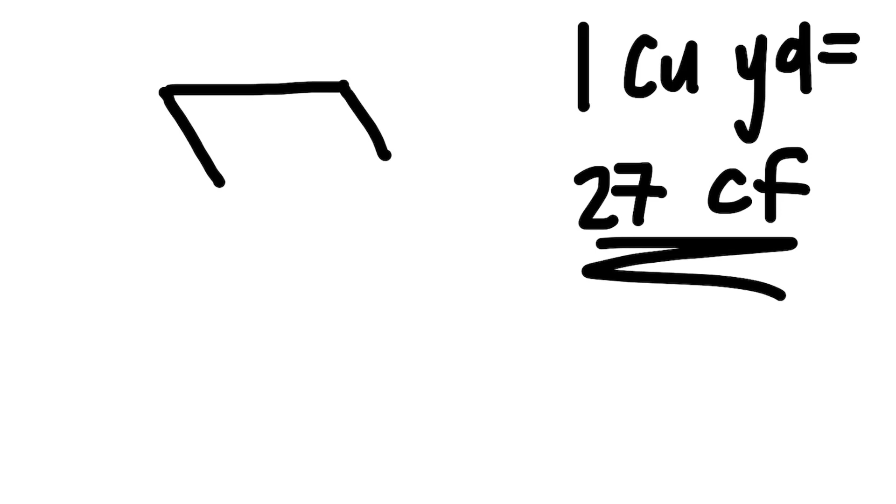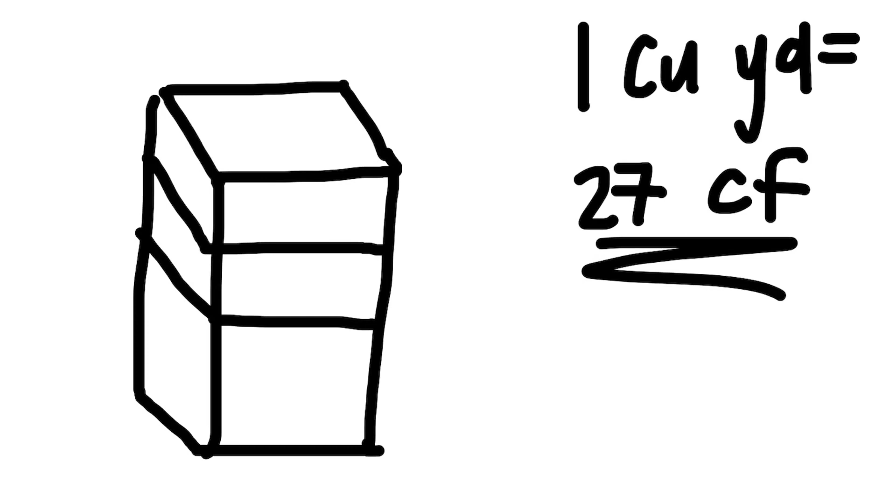So ACI 211 feeds off of something called the absolute volume method. What that absolute volume method means is that we have a certain volume that we're working with. Here in the United States, it's a cubic yard of concrete, which equals 27 cubic feet, because a cubic yard is 3 foot by 3 foot by 3 foot. So I have all this volume to use up. Now, what am I going to do with that volume? We didn't really use a method like that. We used a different method, but ACI 211 gives you a standard guideline to design or choose what to use.

And this is bookcrete. But what do we know about bookcrete? Not the same as labcrete, and not the same as realcrete. This doesn't take into account size of the aggregate or the dirtiness of the aggregate, the number of fines, temperature or weather. Nothing. The type of cement, the cementitious that you're using. And it even has guidelines that the use of water-reducing admixtures, ASTM C 494, may also be used to reduce mixing water by 5% or more. So what they're insinuating is that's not taken into account here.

Okay, so looking at your information, we have a non-reinforced slab on grade, 6 inches thick, exposed to severe freeze-thaw and de-icing. Compressive strength must be 4,000 psi at 28 days. And I want you to design a cubic yard and 1.25 cubic feet. So that question you asked before about how do I go from pavement to lab, by the end of this, you're going to know how to do that.

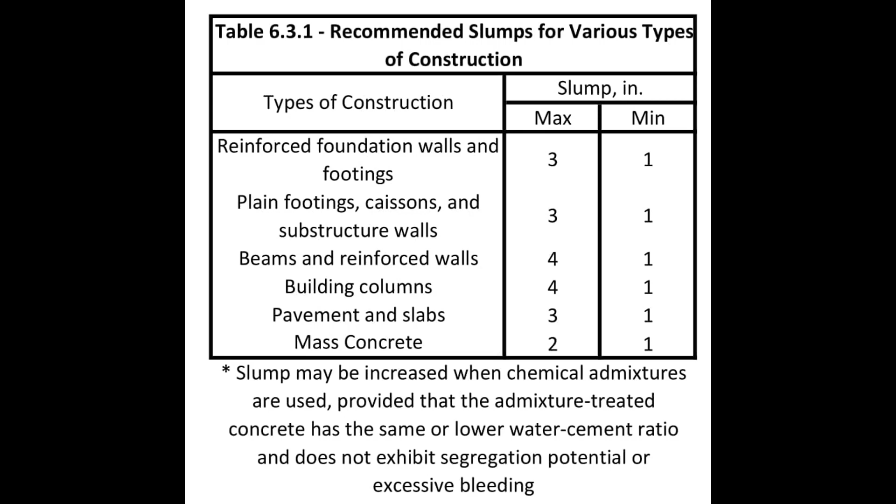So we're going for a total water cementitious ratio design, if that's what you want to call it. Sure. But it's not with admixtures. So the thing that we're looking at are pavements and slabs, and that's what we're designing. So if we look at a pavement, we see maximum of 3 inches. It says maximum 3, minimum 1. So what I called it there was 2 inches plus or minus 1 inch. So this is step 1.

So here, if you want to be picky, you can always say, hey, I know my industry and a 3-inch slump is not what I need. I'm going to choose to bump that up, especially if the requirement is a lower strength. You could always make that decision, but what I say is the first 100 passes that you take through this, you follow it to the letter. You make the mixes in the lab, you make your adjustments from there, but keep this as the level playing field. So I said 2 inches plus or minus 1 inch.

Then step 2, you're going to be using this humunga table right here, and it is an awesome table, and it goes back to a few things. First, your maximum aggregate size, which if we look back at our notes, is 1 inch. We're using a 1 inch maximum MSA river rock. Now, we're also working in a severe freeze-thaw condition. Now, what does that mean? So for severe freeze-thaw conditions, we have to use air-entrained concrete.

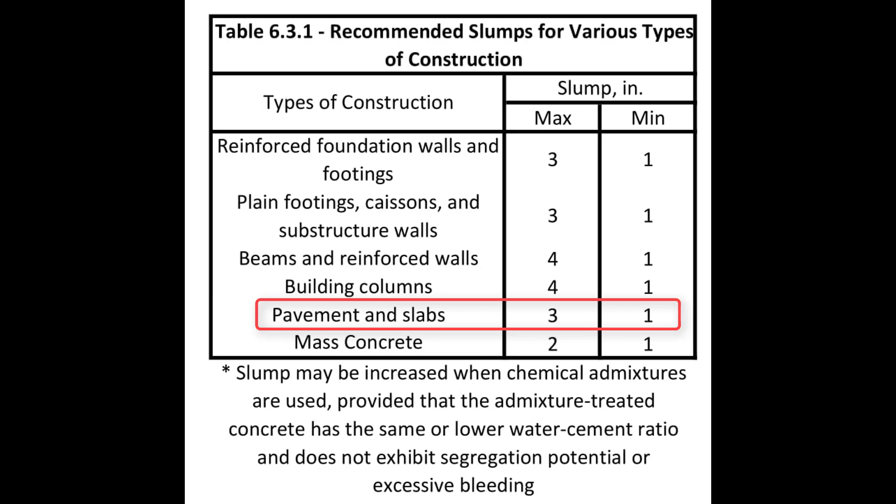Oh, yes, sure. So, going back to this table, this is where we were at. Coming to this table, the first thing is we have a 1 inch maximum sized aggregate, so we're in this column. Then we have to decide, are we non-air entrained or air entrained? Because we're in severe freeze-thaw, that's back in our notes right here, we're in the air entrained, just like you said. So we come down to here. Now the question is, what is our slump? And we said 2 inch plus or minus 1 inch.

Now, if I was on the higher strength side of that, I would choose closer to the 1 inch. But because I'm on the lower strength side, I'm going to choose 3 to 4 inch slump. And that's what this column is, right? So we're on this second level. And that comes to your water, and that's what this gives you, based on your maximum sized aggregate and the slump that you want: you're going to use 295 pounds per cubic yard of water. Cool.

Now here's the thing. There's a trick in this question. So we've got our 2 inch, maximum size 1 inch aggregate, absorption 1%, blah, blah, blah. The water that we use, I said it was 270, so that was the 1 to 2 inch. So let's go back and say it's 1 to 2 inch, right? We say 2 inch plus or minus, so we'll use 2 inches. That's 270 pounds of water, but we end up subtracting 25 pounds. Why did we subtract 25 pounds?

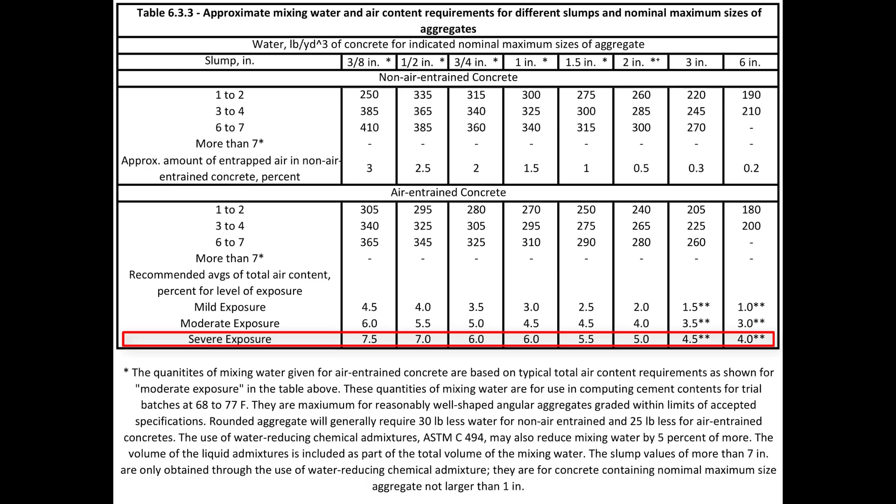Now, there's another piece of information that we need from this, and that is our air content. If you look at the bottom of the table here, you have all these different exposures to freeze thaw, remember this: mild, moderate, or severe. So we, according to our notes, are severe, right? So we go to severe, and guess what? 6%. We're at 6%. So now, we've gone through this non-reinforced slab on grade, exposed to severe freeze thaw and de-icing.

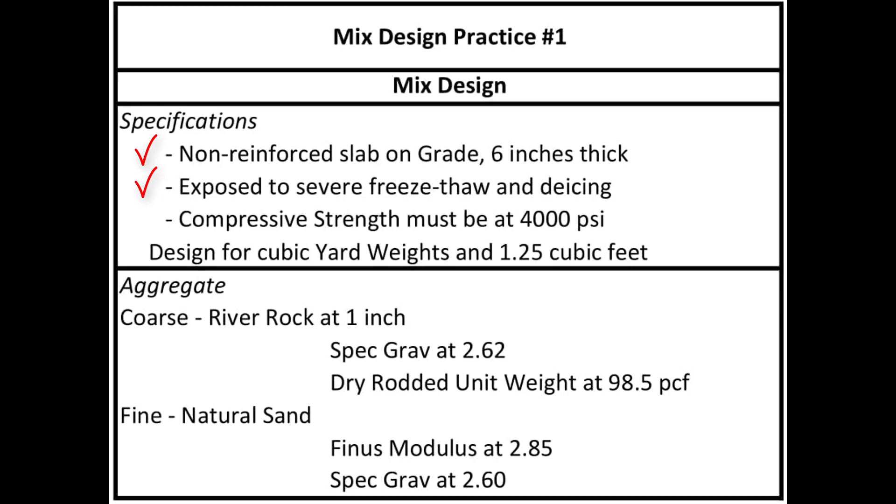Now we're going down to the compressive strength must be at 4,000 psi, and that's supposed to be at 28 days, right? So that's the next step, and that's here in table 6.3.4a. So we say, okay, we want to be 4,000 psi.

Now here's the thing, there's two ways of going about doing this. You could say it's either 4,000 psi, or you can say it's 4,000 psi plus 1,200 psi, saying that we've never used this mix before. And it seems like here I'm choosing to go just with the 4,000 psi. But if you wanted to do that, you can jump to the 5,000 psi or even use linear extrapolation to say, well, I want 5,200.

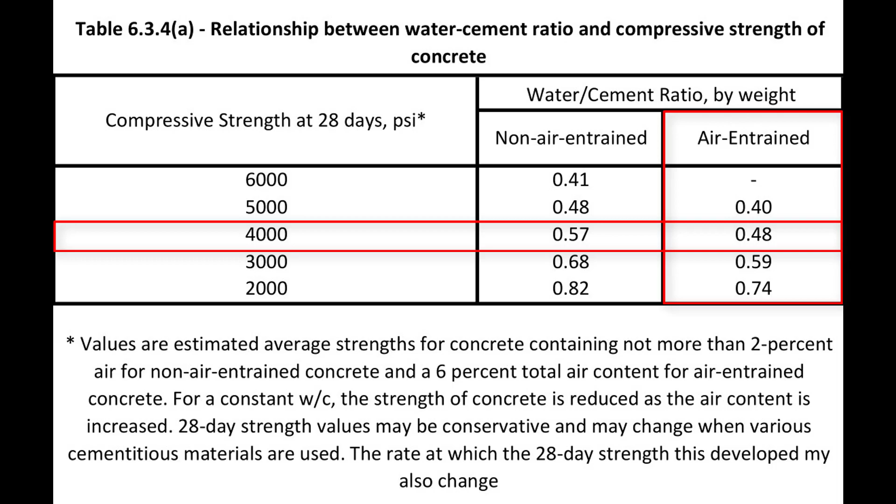Sure. But for us, we're going to go 4,000 psi, and it's air entrained, so 4,000, that's non-air entrained, there's air entrained. So we're at a 0.48 water cementitious ratio. So strength 4,000 psi, we got our air over there at 6%. Strength at 4,000 psi, we use our table, and it says 0.48. And then they have you do a check. They say maximum permissible water cementitious ratio for concrete in severe exposures. Are we in severe exposures?

Yep. So why do you think that they're doing that, Haley? To just cover their butts. Yeah, durability wise. Yeah, you make a porous concrete in a high chloride, high freeze-thaw environment, it's going to go to shit. So it gives you 4 different categories. Structure wet continuously or frequently exposed to freezing and thawing, or structure exposed to seawater or sulfates. So it's more freeze-thaw. We do know we're in the Denver region, so we're not seawater, we're more exposure to freeze-thawing.

Now, this is for a slab on grade that's 6 inches thick. Are we a thin section? No. Are we a railing? No. A ledge? No. Ornamental work? No. Not ornamental. Less than 1 inch cover over steel? No, because we're non-reinforced. So we're all other structures, and the maximum we can be is a 0.5. Okay. Where are we? 0.48. Boom. So, are we good? We're good. So that's our next check off. I miss this. Right? Well, you get to do this all the time. So that's 0.50. We're good to go.

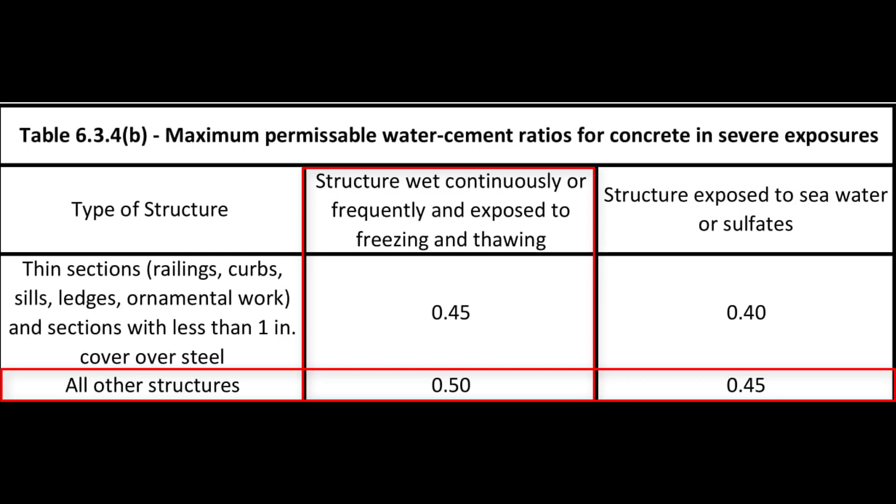Okay, so the next thing that we do is we decide a very specific number that we need from this table 6.3.6 to determine the volume and then the weight of our coarse aggregate. And that number is called the volume of coarse aggregate per unit volume of concrete. Isn't that an amazing number? Yeah. And it's based on a number of things. First of all, the maximum sized aggregate, which we know is 1 inch. So there's our 1 inch. And then it gives us our fineness modulus here that we have to use. And our fineness modulus of our sand was 2.85. So we have this 2.4, 2.6, and 3.0.

And there's 2 things that you can do. You can either say, hey, I'm going to use linear extrapolation and I'm going to determine what it is to the 0.001. Or you can say, well, I have 3.0 and I have 2.8. What is my number closer to? Is it closer to 2.8 or 3.0? And our value was 2.85. Okay. So we're definitely closer to the 2.8, which here I believe is 0.67. Now, we used 0.66, and I believe that was from linear extrapolation. Either way, it's again what you're more comfortable with.

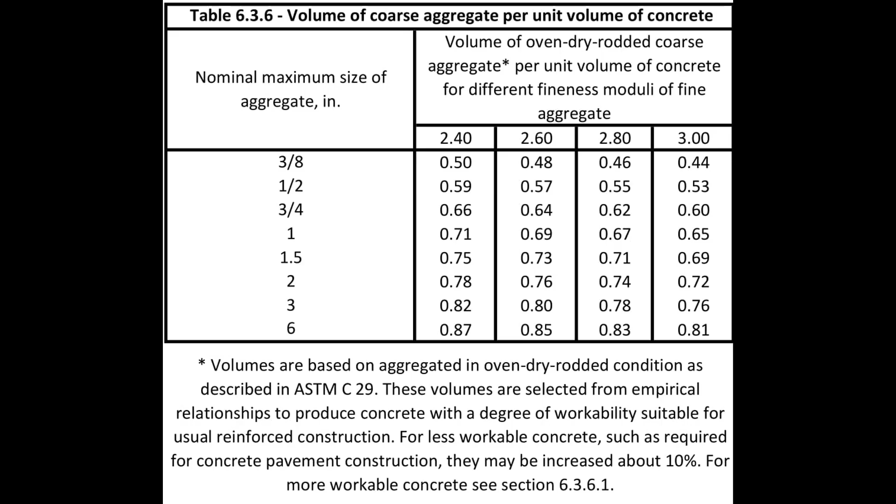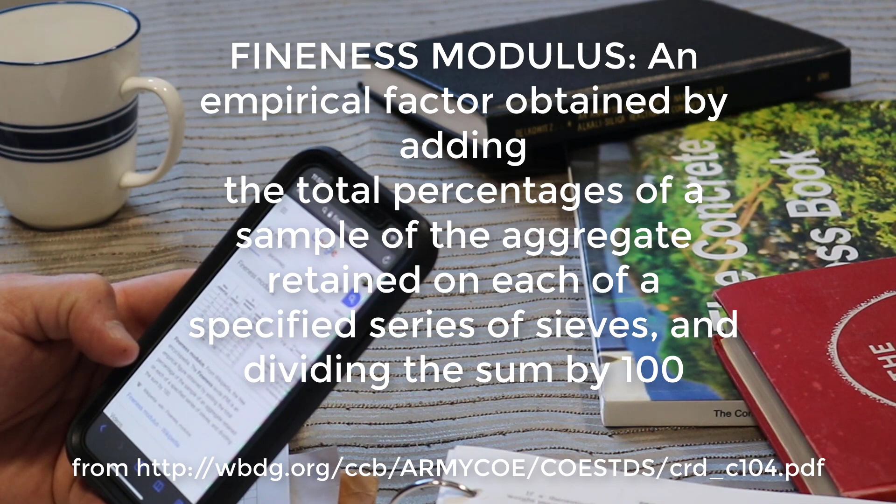What's the definition of fineness modulus? Do you remember that? I think it's the FM. The fineness modulus is an empirical factor obtained by adding the total percentage of sample of an aggregate retained on each of the specified series of sieves and dividing the sum by 100.

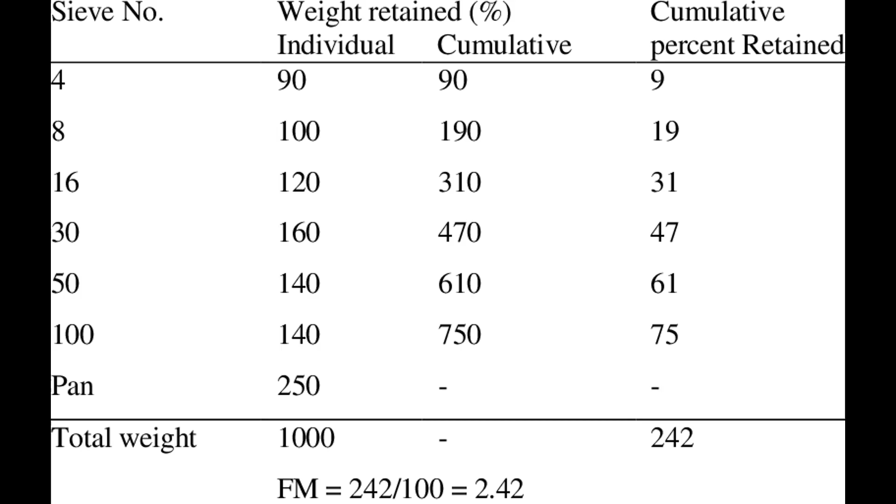And this is about the sand. So the fineness modulus of sand is the cumulative percentage retained on specified sieves. So here you go. They go from a number 4 through the pan, and they're just doing the weights retained divided by 100. Easy. So again, you're taking into account something from both aggregates.

Now, if you look at Oklahoma State University, what is Tyler's software package, the Tarantula? Oh, Tarantula curve. That is a little bit more specific. There's also another product, and you could just do it yourself. Look at different aggregate to paste or paste to aggregate ratios, find where you like, and then when your aggregate changes, you can make those changes based off of the porosity index that you're getting from the new aggregate and the paste content that you liked, or the paste to aggregate ratio, or vice versa.

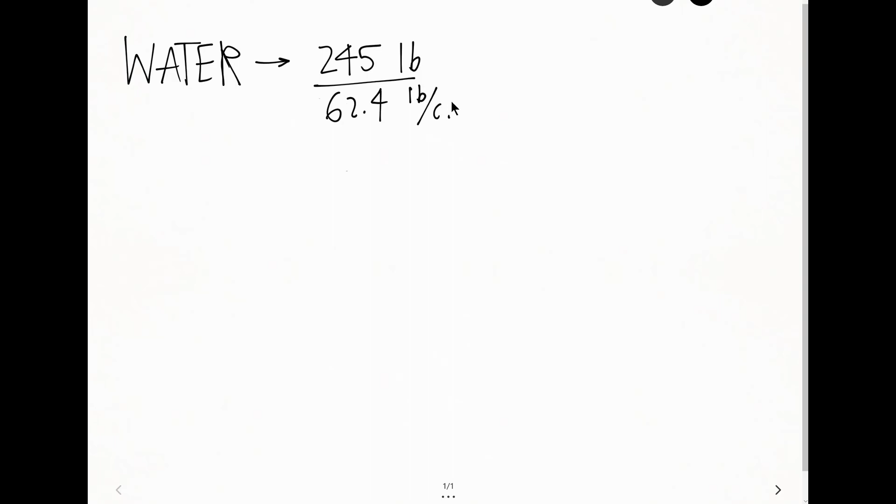So anyway, getting back to this, now that we have that initial information, we can get back to our absolute volume method, 27 cubic feet. So you always got to remember that's how much we're working with. So the first thing is we've got our water, and we had 245 pounds per cubic yard of water, so we divide that by the unit weight of water, which is 62.4 pounds per cubic foot, giving us 3.92 cubic feet out of the cubic yard. 27 cubic feet. Correct.

After that, we've got to look at the cement. Now, we're not looking at fly ash yet. We'll get into the nitty gritty of that.

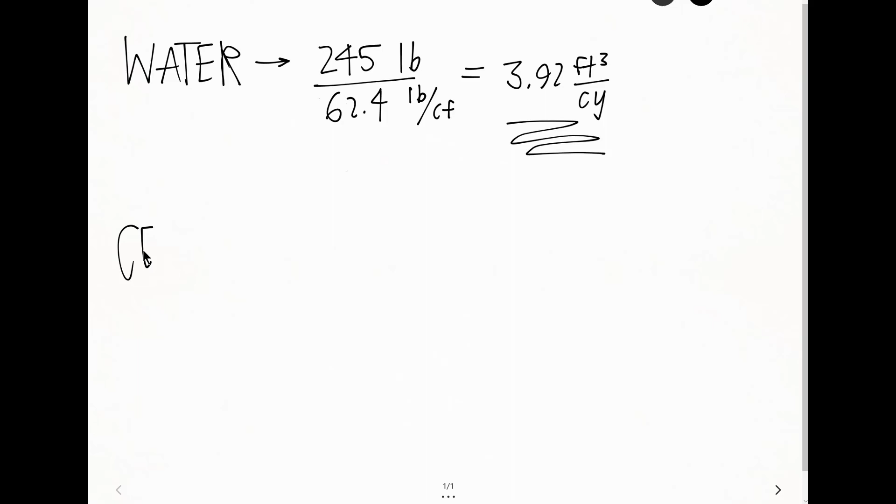No pun intended. I don't understand the pun. If there was a pun. Gritty. Oh, rock. It's funny.

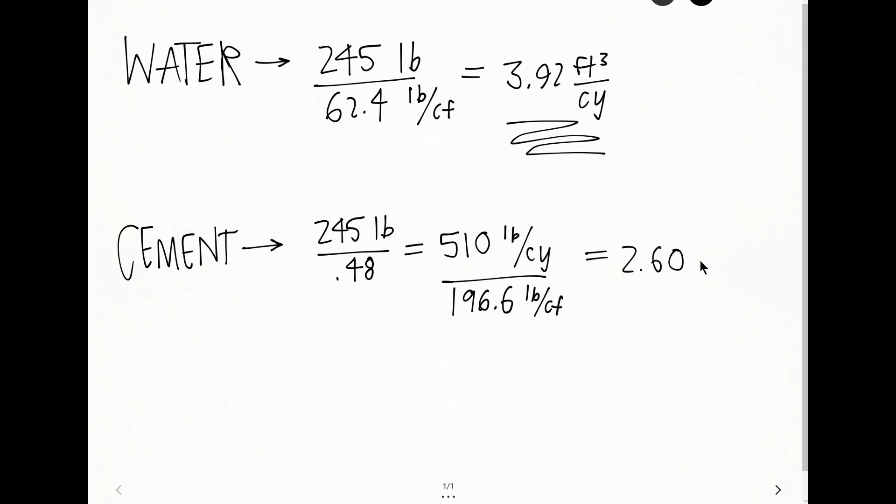But looking at the cement, the first thing we have to do is determine how much cement we have. We do that by taking our weight of water divided by our water cement ratio, which gives us 510 pounds per cubic yard. Now, to get the volume, we divide that by our unit weight of cement. Our standard specific gravity of cement is 3.15. So 3.15 times 62.4 pounds per cubic foot gives us a unit weight of 196.6 pounds per cubic foot. So when we divide 510 pounds per cubic yard by 196.6 pounds per cubic foot, we end up getting 2.6 cubic feet per cubic yard.

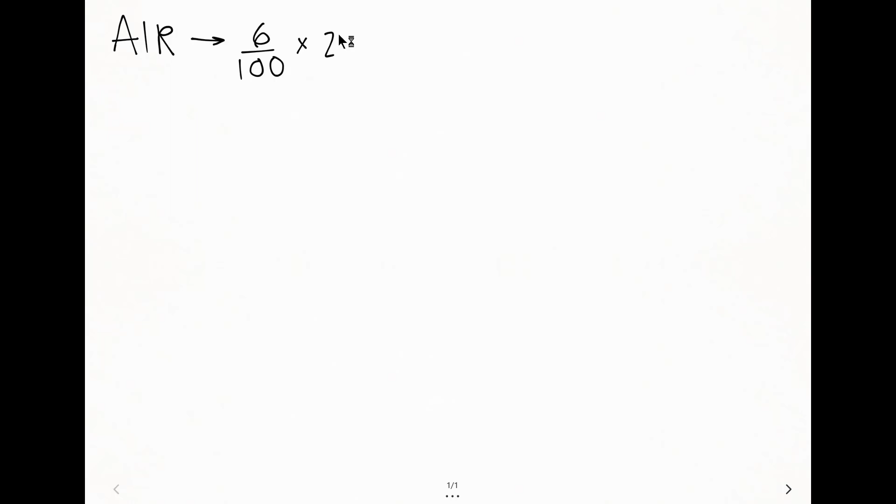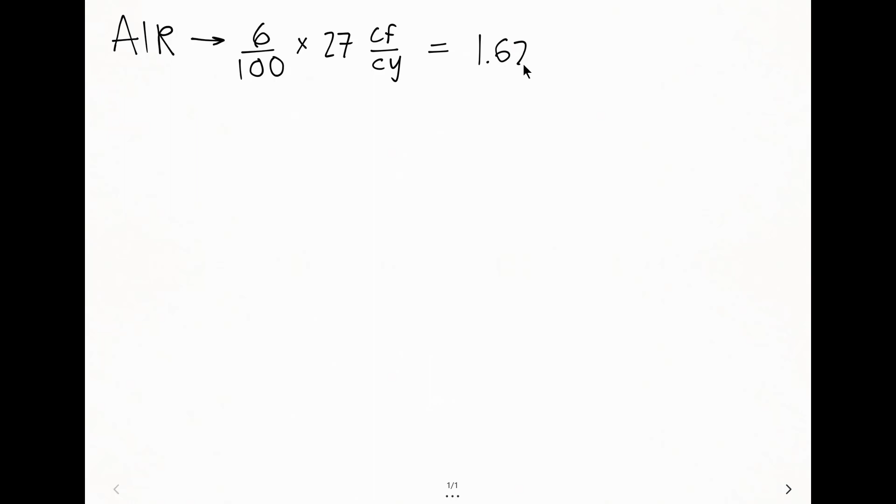Now, so we have the water, we have the cement, and I'll number these. Let's go to air. With air, we know we have 6% air. How do we turn that into cubic feet? Well, if we have a 27 cubic foot per cubic yard volume, and 6% of that is air, we literally just divide 6 by 100 and multiply by 27 cubic feet per cubic yard. And that gives us 1.62 cubic feet per cubic yard.

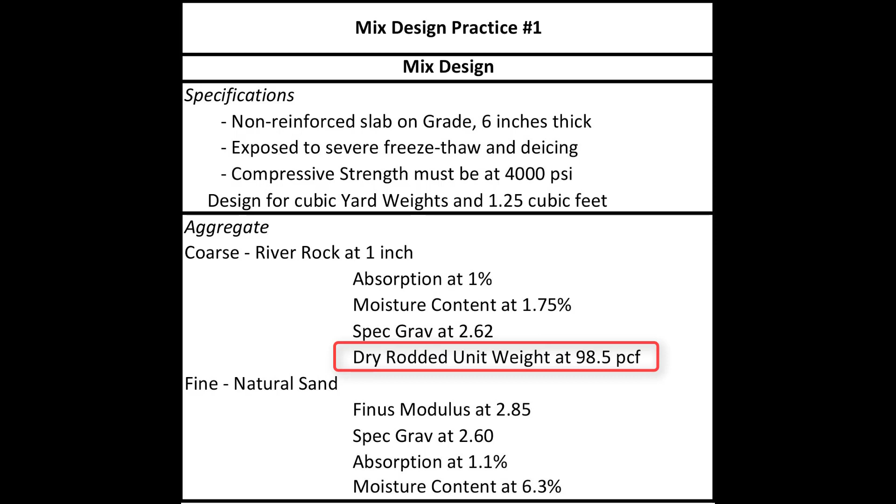Now, going back up to coarse aggregate, we have our 0.66 volume of oven-dried rodded coarse aggregate per unit volume of concrete for different FM of fine aggregate. So we take that 0.66 and multiply it by 98.5 pounds per cubic foot, the dry rodded unit weight given to us earlier. That only gives us pounds per cubic foot, but we've got 27 cubic feet per cubic yard, so multiplying by 27 we end up getting 1755 pounds per cubic yard.

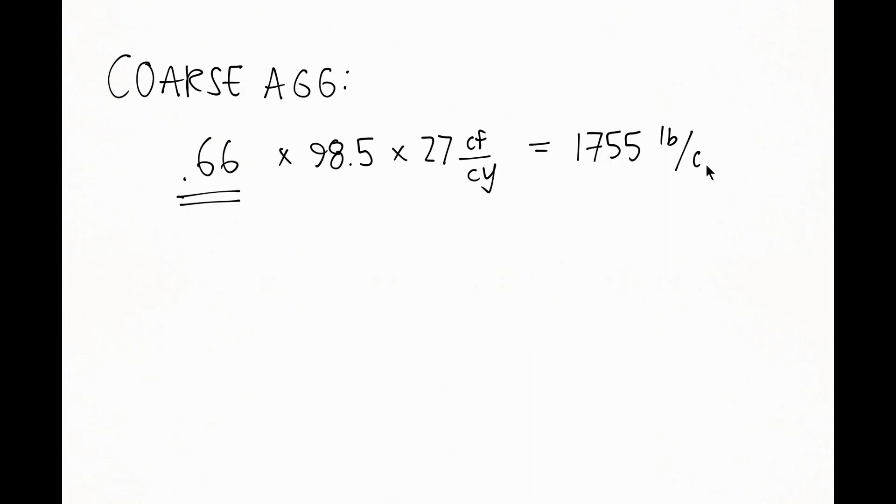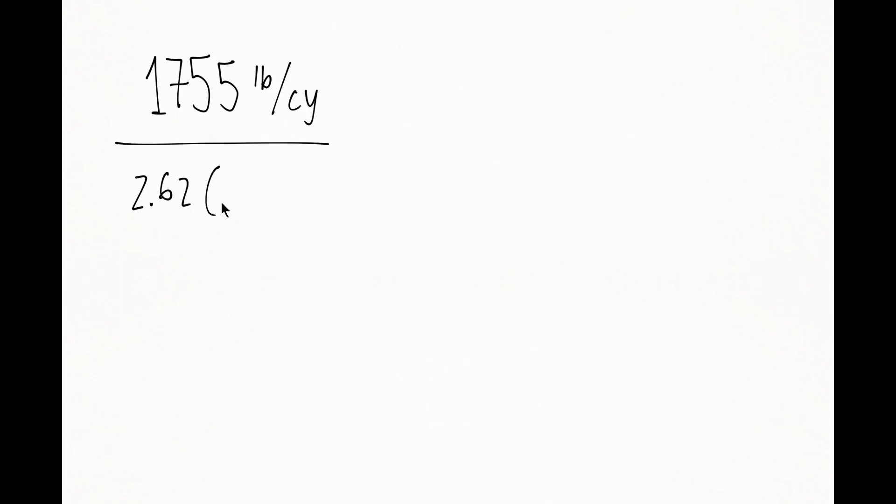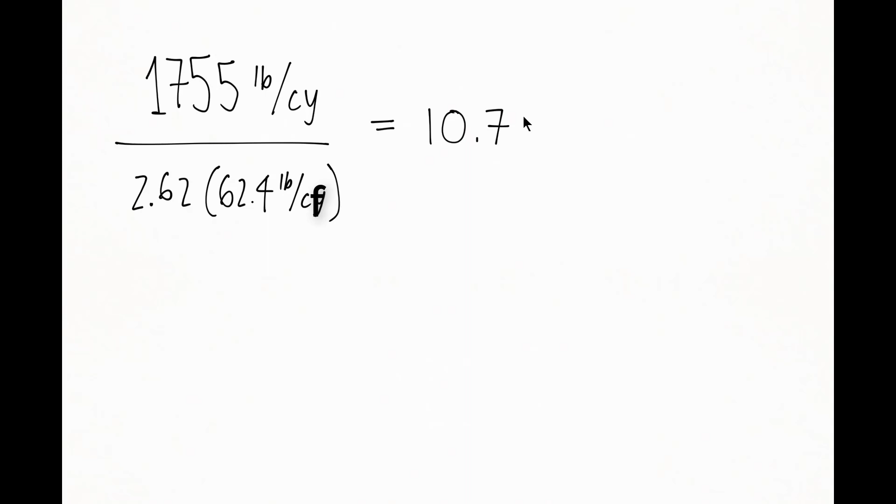And then to get the volume, we divide that 1755 by the specific gravity of that rock, which was given as 2.62, times 62.4 pounds per cubic foot, which gives us a volume of 10.73 cubic feet for our cubic yard of concrete. Now, when we add all of those up, the 3.92 cubic feet per cubic yard of water, the 2.60 of cement, the 1.62 of air, and the 10.73 of aggregate, we get a total of 18.87 cubic feet per cubic yard that is used up.

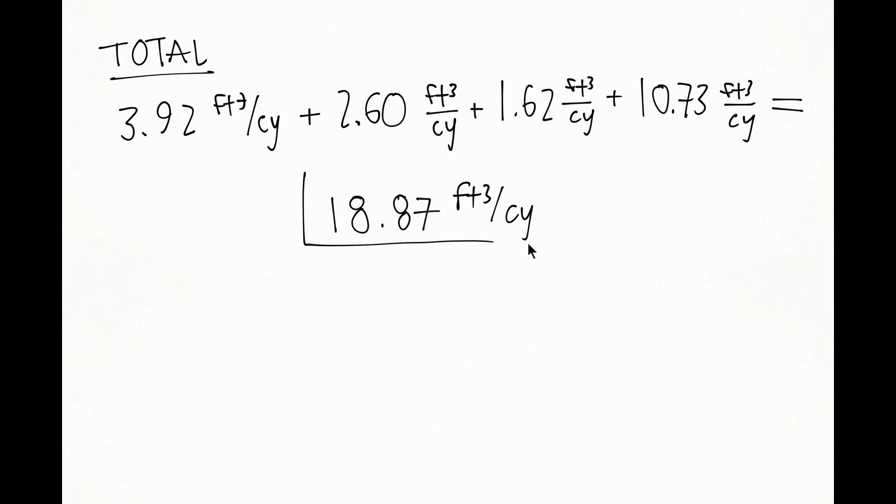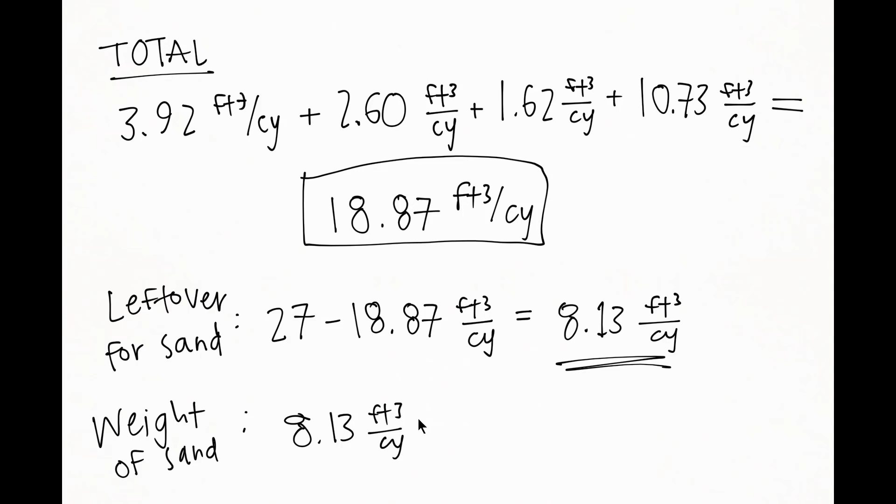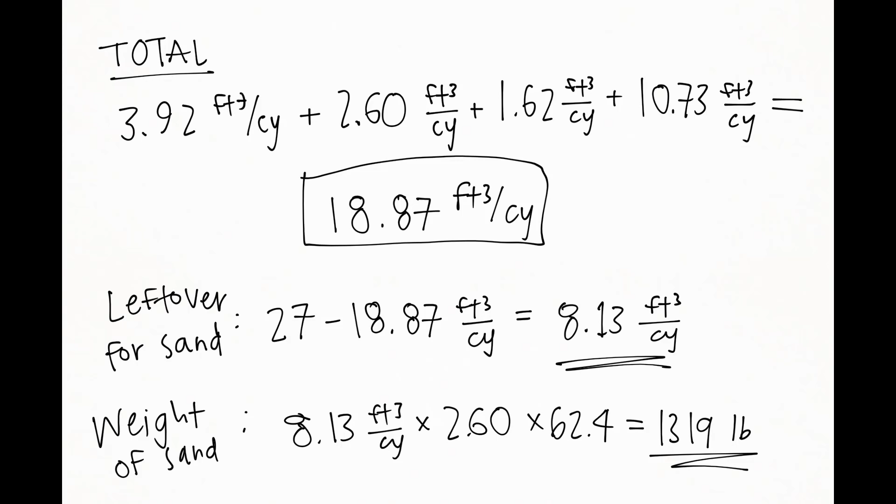So that means left over we have 27 cubic feet per cubic yard minus 18.87 cubic feet per cubic yard, with a leftover of 8.13 cubic feet per cubic yard of sand. So to get our weight of sand, we take that 8.13 cubic feet per cubic yard times the specific gravity of our sand given to us earlier, which is 2.6, multiplied by 62.4 pounds per cubic foot, to give us 1,319 pounds per cubic yard of sand.

What we could have done is, instead of using that method, we could have used the first estimate of weight of fresh concrete, which, if we have a 1-inch rock and it was air entrained, we start out with 3,850 pounds, and we just start removing from there. And I personally just don't like that method, but ultimately, through those calculations, we end up with a final design weight of 245 pounds per cubic yard of water, 510 pounds per cubic yard of cement, 1,755 pounds per cubic yard of our river rock, and 1,319 pounds per cubic yard on our sand.

And because we have 6% air, I suggest 0.5 fluid ounces per hundredweight of an air entraining agent. And then, more than likely, because we want a 1 to 2-inch slump, we might not need to use a mid-range. But if we are going to use a mid-range, we would use 2 fluid ounces per hundredweight.

Okay, so the next piece of this is we have these weights of our aggregate, and we have this water content, but that is just bookcrete. It's not labcrete or realcrete. And what we have to do is take into account our moisture content and our absorption, not only for the weight of the aggregate, but also for the batch water. So what we're going to do is use the information given to us. For our coarse aggregate, we had a moisture of 1.75%, and for our sand, we had 6.3%.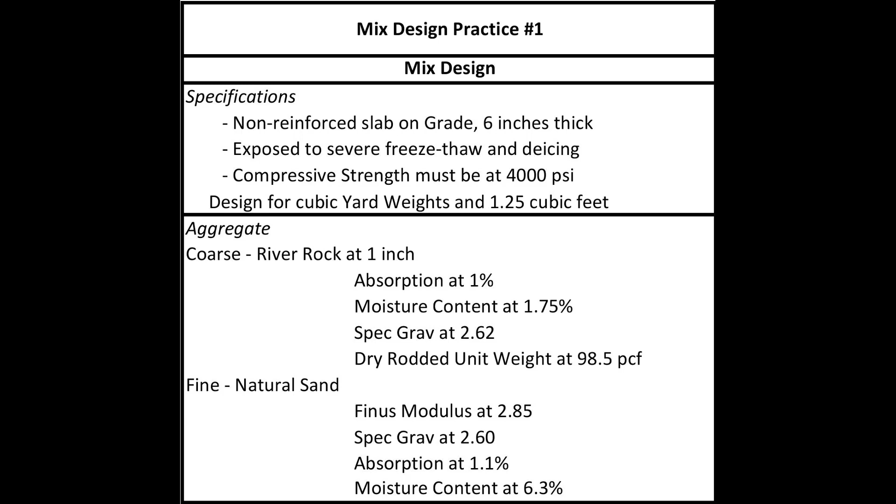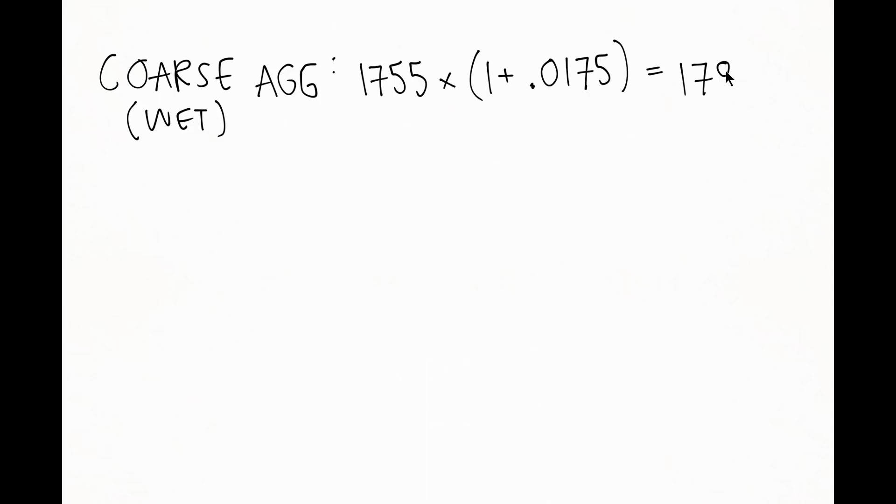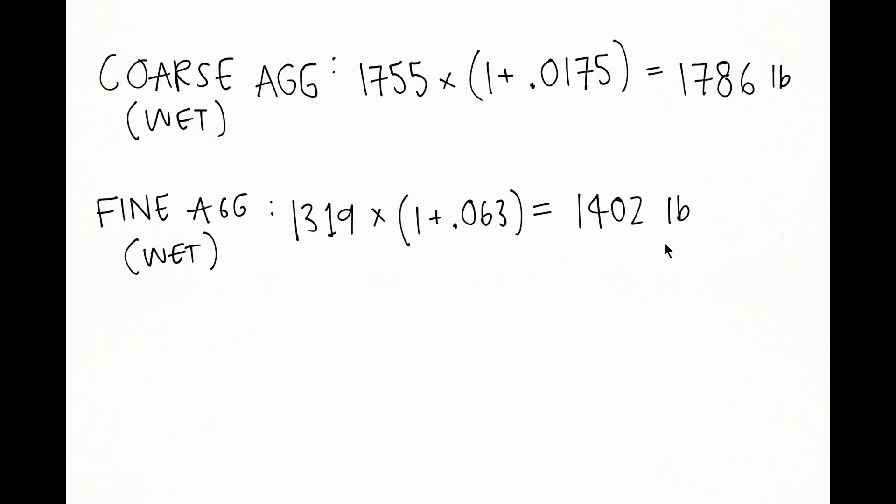So to get our moisture-laden weight of rock, we take 1,755 pounds per cubic yard of our rock and multiply it by 1 plus 1.75%, which ends up being 1.0175, which gives us 1,786 pounds. We do the same thing for sand, multiplying 1,319 pounds per cubic yard times 1.063, or 1 plus 6.3% divided by 100, to give us 1,402 pounds. Now that's going to be our new weight of rock and sand respectively.

The next thing that we have to do is take into account the free water. If you have your rock here, your rock is going to have pores in it. The absorbed water is going to be the weight of water that the rock absorbs into its body. And then the moisture content is that absorbed water plus whatever water is on the surface, and the moisture content minus our absorption is this free water that's going to immediately contribute to the batch water, and if it's not taken care of, will ultimately contribute to a water of convenience.

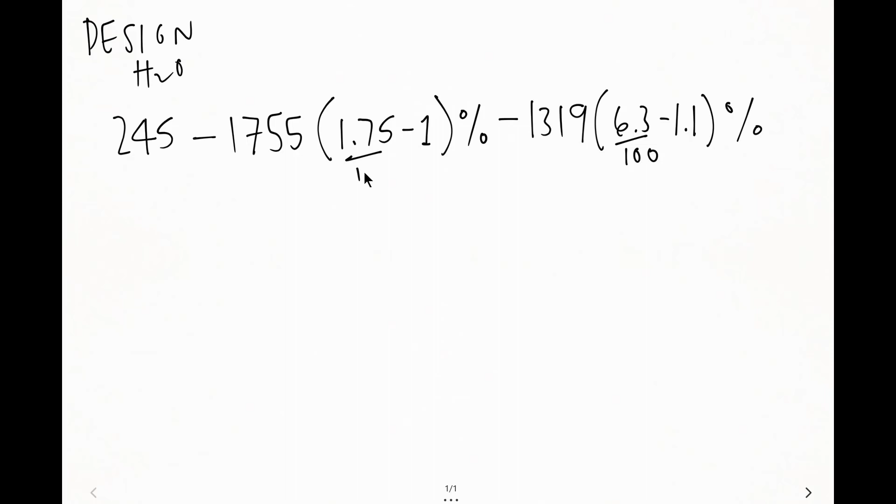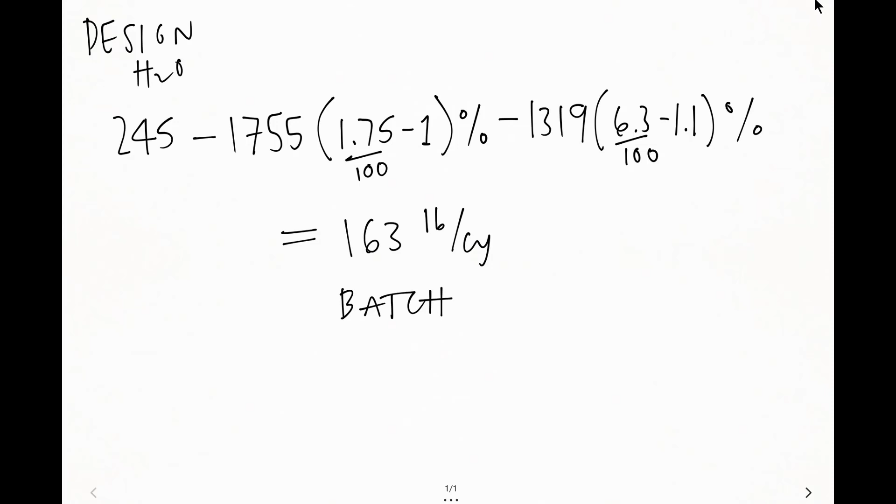So what we end up doing is taking our 245 pounds per cubic yard, our design water, and using our information for our rock and our sand to determine our batch water. So we take our 245 and we subtract 1,755 pounds per cubic yard times the quantity 1.75% minus 1%, divided by 100. Calculating all that through, you'll find that your new batch water is going to be 163 pounds per cubic yard. Please bear in mind, your 245 pounds per cubic yard is your design water, and taking into account the moistures and absorptions of our aggregate, we have a new batch water of 163 pounds per cubic yard.

So our estimated weight for a cubic yard of concrete is 163 pounds per cubic yard of water, 510 pounds per cubic yard of cement, coarse aggregate 1,786 pounds per cubic yard, fine aggregate 1,402 pounds per cubic yard, to give us a total weight per cubic yard of 3,861 pounds. So that was fun, because we just got it done.